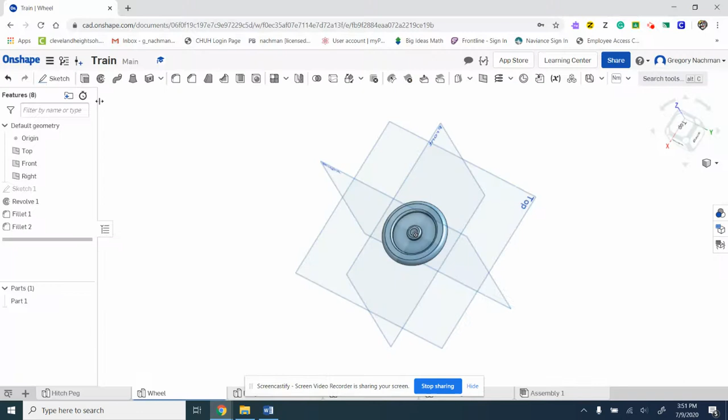So now we're going to start working on the second video for the wheel, and we're going to work first on making these holes here. To do that, I'm just going to put a sketch on the back, pretty much just dimension what's going on over here. So I'm going to flip this around on the back and put a sketch there.

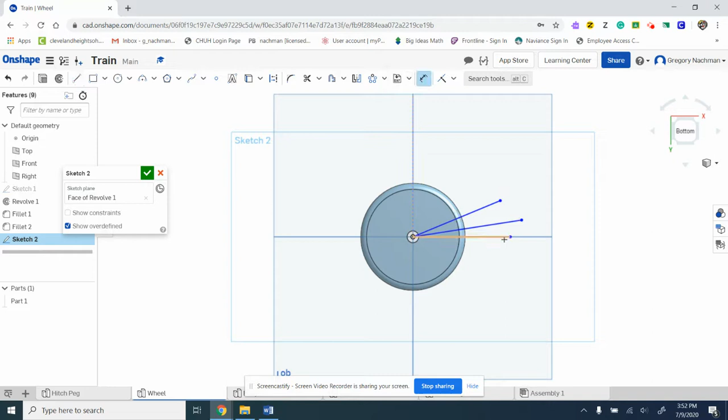So that's a line, press escape. Another line. And another line. That's 15 degrees. And that's 30 degrees. I don't know why I remember that and didn't remember other stuff, but.

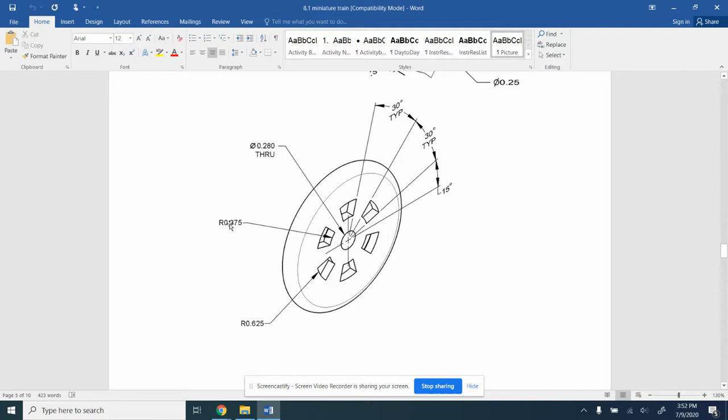And then these are just circles, so we're just going to make circles. This first circle is 0.375, and it said R there, so R means radius, so you've got to multiply that by 2 because all circles, you need the diameter for it. And if you messed up, that'd be okay, you can just double click and it'll come right up.

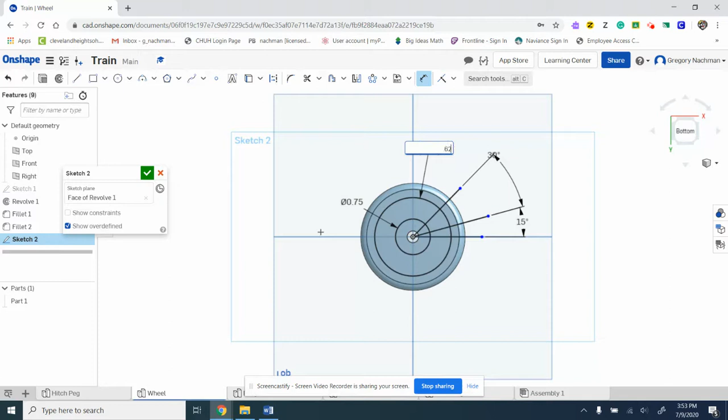And we'll dimension that, and that one is 0.625. Again, it said R, so you're going to multiply it by 2.

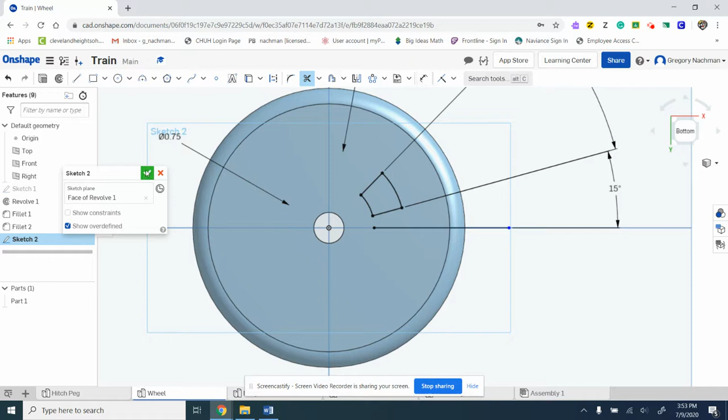And I'm going to trim away everything I don't really want, because I only want that little section. I know we made a lot of lines and just a ton of stuff, and we're not using most of it, and that's okay. I'm going to cut that little part out.

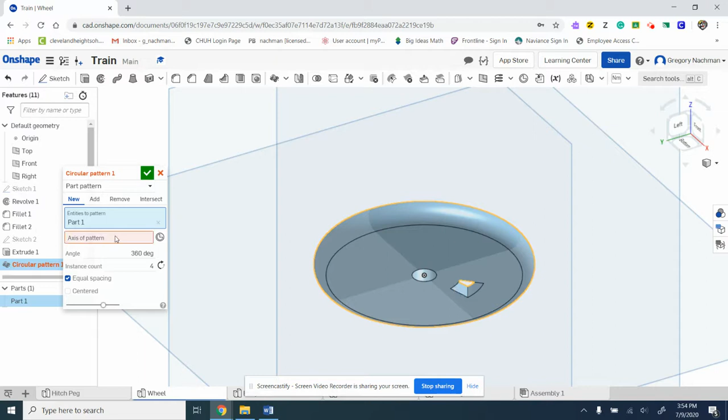Let's do a circular pattern, because there's 6 of those guys. We want 6. We're cutting that out.

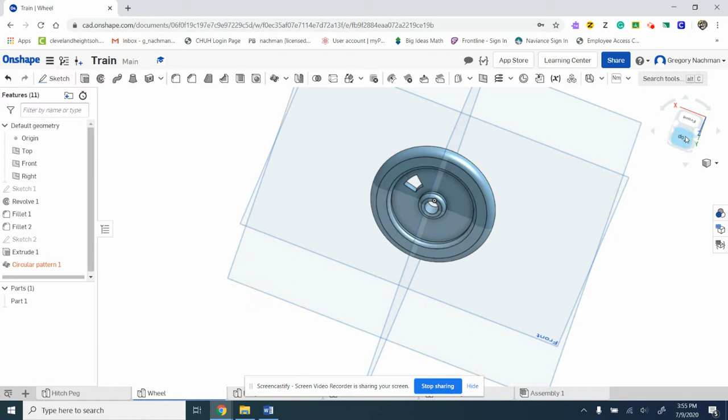I don't know why that did that. So what I'm going to do is double click on that extrusion. Sorry, I'm going to double click on that sketch. I'm going to see, can I do a circular pattern here? Well, let me look.

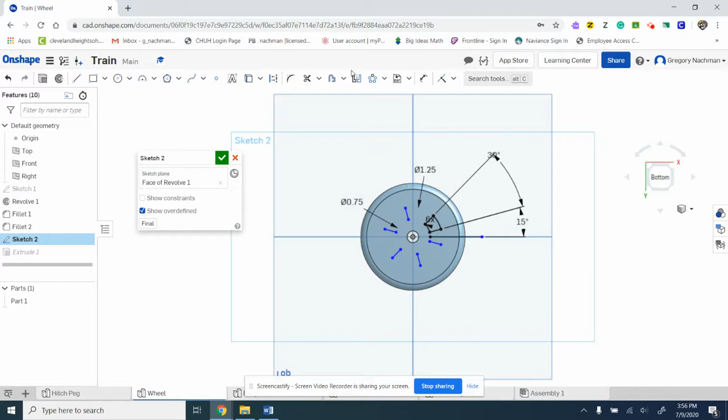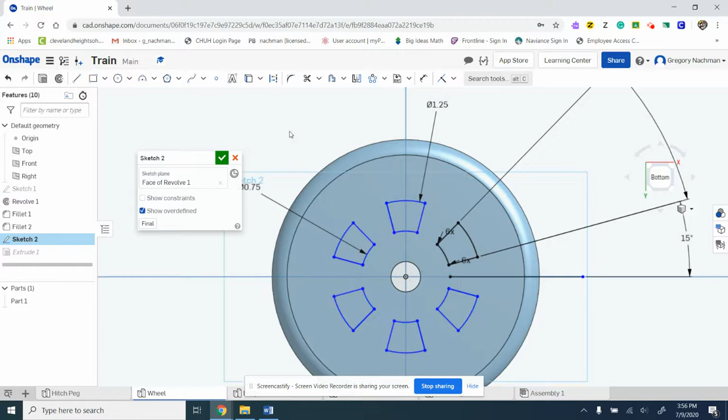I want 6 of those. So that was weird, right? And that's okay. I don't know why it said 3. We want 6. Which is great.

I'm going to double click on that extrusion just so I can edit it. So I'm doing all this to show you that it's okay to be frustrated and that you'll just have to edit it, which is great. Not a problem.

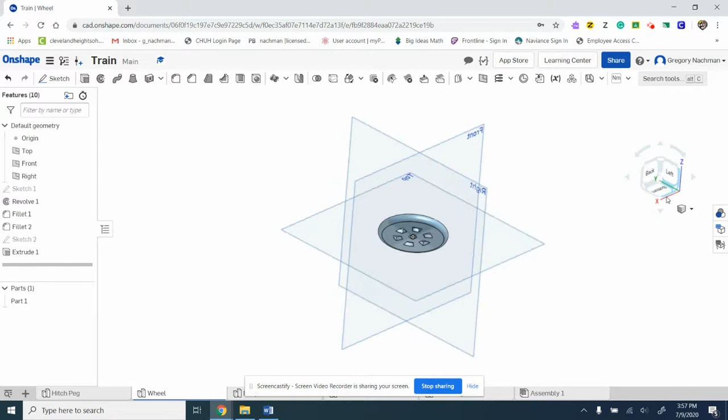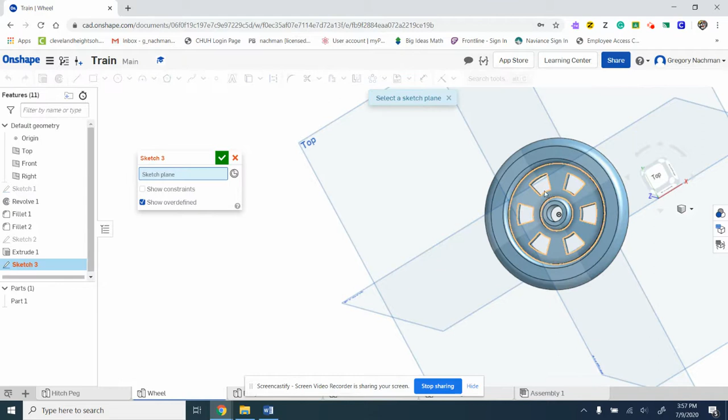Now the last part of this wheel is this circular part, the little part where everything goes on, and it gives you information about it right here. So we'll put a sketch on this, and I want to make sure I do the right measurement, just like everything we do. And that says 0.7.

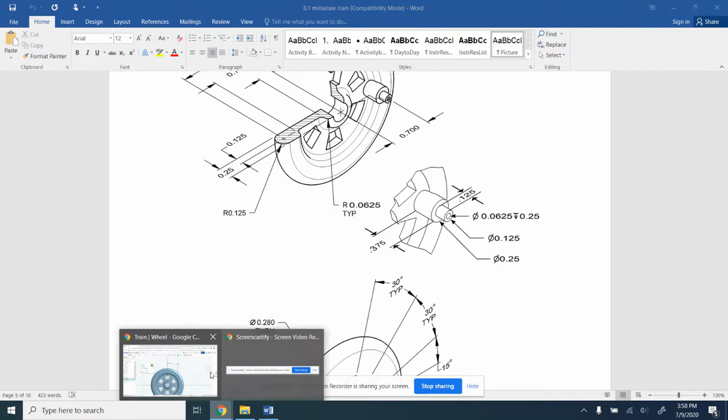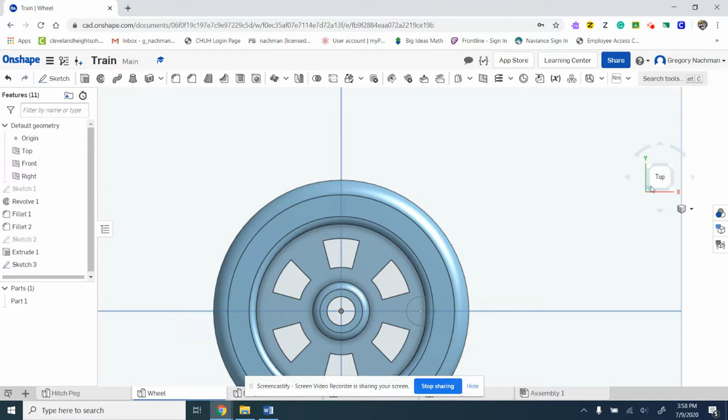I'm going to put a circle here, and you know how big that circle is going to be. And if you look here, that's pointing to 0.25. Let's extrude that. And you see how it doesn't like put everything in there? Because this other part of the circle wasn't selected as well.

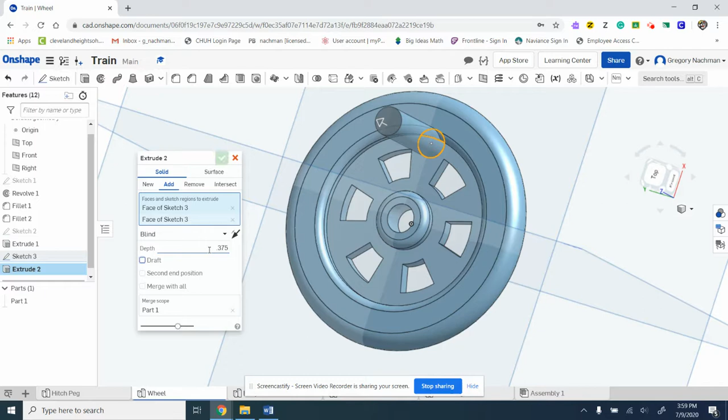And that's 0.375. And we'll put another sketch on there. So that diameter is 0.125.

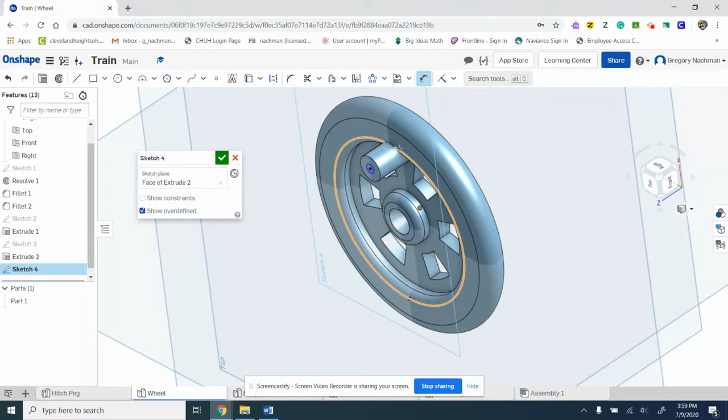That didn't dimension how I wanted it, so I just pressed escape. And this inside of it is 0.0625. Again, not what I wanted, so I hit escape. Probably just hit something, that's okay. 0.0625.

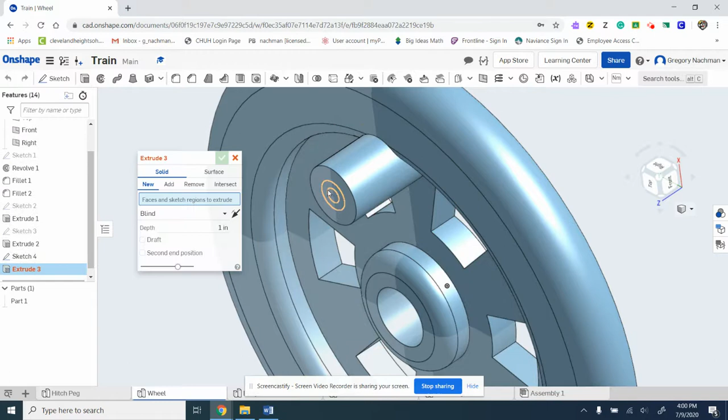And 0.125 is the distance. So we just made our wheel.